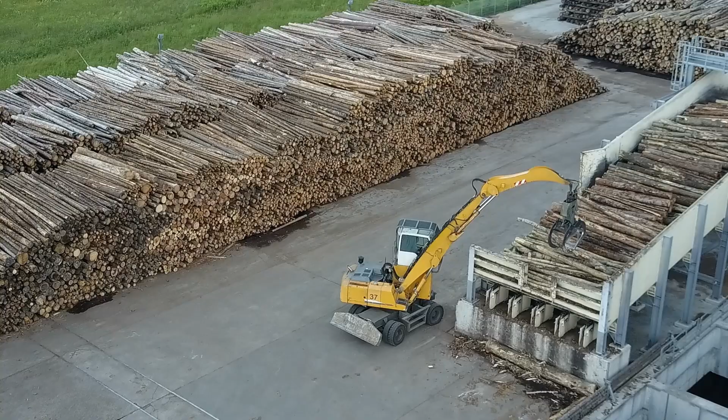Today we have a special guest from one of our partners, Asta Fivgas, who works for RWW, Reflections Window Wall. They are in the process right now of designing and will start building our Passive House rated facade at the Edison, which is the 32-story mass timber project in downtown Milwaukee. One of the big feats they are tackling is how to design a glass facade that meets Passive House criteria, which for those who know Passive House is no easy challenge.

So today we're going to talk a little bit about the Edison and then dive into the sustainability features of our facade and how RWW is designing the facade to meet Passive House criteria. So Asta is going to walk us through it, which I'm excited for. And maybe, Asta, just to kick us off, if you could give us a little bit of background on yourself and RWW. Sure. Hi, everyone.

My name is Asta Fivgas. I am the Director of Preconstruction at Reflection Window and Wall. I've been with Reflection going on 7 years at this point. My background's in architecture. I'm a registered architect in the state of New York. Design-wise, I started in high-end design, moving into more technical architecture, worked at Thornton Tomasetti for a time before joining Reflection on the construction side, learning more about technical aspects of new facades and high-performing facades, as well as a lot of our sustainability. So thank you for having me.

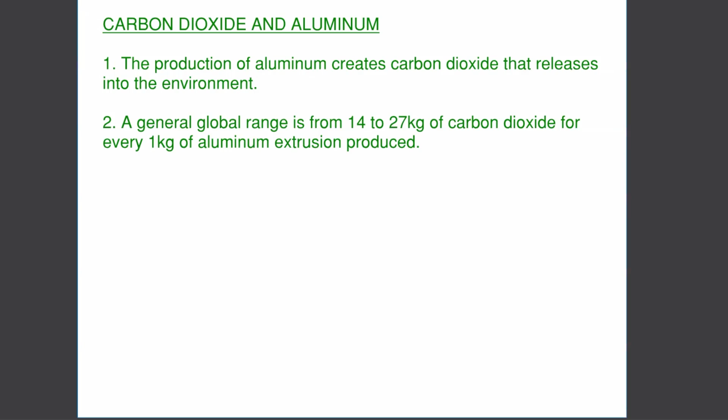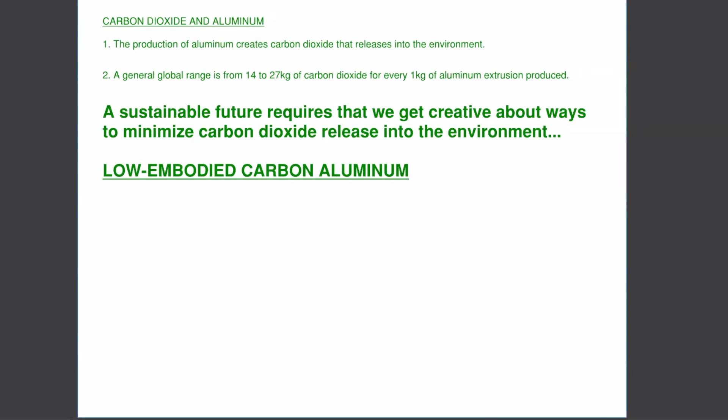So one strategy that we've worked very hard on at Reflection that I'm very proud of and that we are trending towards across all of the new projects that we're working on is looking at low embodied carbon. A sustainable future requires that we get creative about the ways to minimize. So low embodied carbon aluminum utilizes supply chains that are able to support their production by way of renewable energy, as in solar energy and hydro-powered plants.

And if we're at an initial rate of 14 to 27 kilograms per 1 kilogram of aluminum, that can be reduced down to 2.6 to 4 kilograms per one. And that's an 80% plus improvement depending on who you're working with and who you're supplying from. So when we started talking to Neutral Project about this job, that was a big point that we were really excited to commit to exploring and trying to utilize on this job.

And one thing that I want to just point out quickly for those that are listening is that we're not reducing the amount of energy or embodied carbon required to make aluminum, but instead we're just replacing the source of that energy. So instead of getting it from coal power plants, we're getting it from solar and hydro powered plants. So we don't have the magic cure for figuring out how to make aluminum with way less carbon and way less energy. It's just basically replacing and substituting some of the energy sources. Correct. So it's focusing on partners who are able to provide more sustainably minded energy sources for their production.

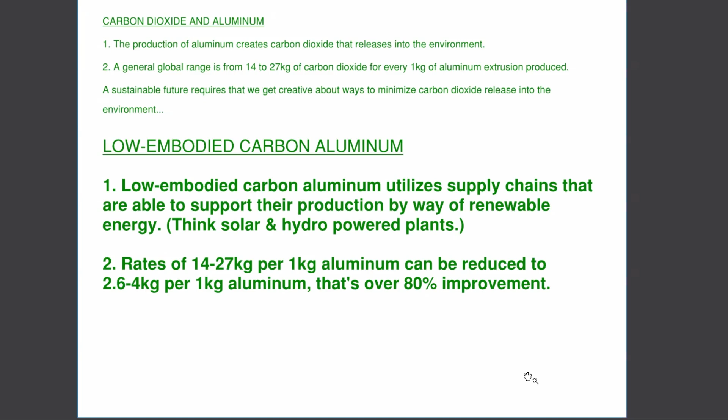That's 100% correct. And we don't really stop at just low embodied carbon aluminum for this job. We also are working with partners across the board in other aspects of assembly, sealant, paint, all of those different areas where the unitization is affected, who are able to do that with solar powered plants. And luckily via both Mumbai and Qatar, I think we're more focused on Mumbai for this project at this point, Dow just certified one of our partners for the carbon neutral sealant. So we're able to utilize that on this job. So it's not just the aluminum production itself, but what are the other aspects of the project that can be more sustainable.

Moving on quickly to this next point, talking about performance goals of the project's facade. So as Nate mentioned, this is a passive house project. So there's a tremendous amount of goals across the board for all scopes. Regarding ours, it's the idea of a high performing facade. So Reflection's able to assist with a lot of energy modeling. We've been working with the project team to review and model different selections, different ideas, figure out how it impacts the job on both micro and macro levels and how it contributes to the overall building.

So perhaps if something in the facade moves a little higher, it can offset something in the HVAC and vice versa. The project also required triple glazed units instead of regular IGUs. There was an increase in the project on opaque versus vision area to improve the R value of the building. The goal for this project for vision was a U value of 0.24, which is lower than typical code, which converts to an R value of 4.17.

Additionally, for the TGUs, for performance, there's a requirement for warm edge spacers, argon infill, some of the more typical things, but applied to the triple glazed. And then also looking at triple silver low E as the baseline for the low E product. And the TGU stands for triple glazed unit. Yeah.

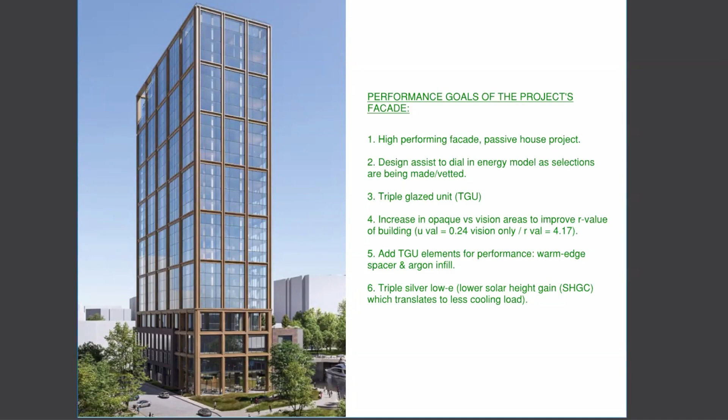And that's a nice little render from an early phase of Edison. So let's talk about low E. So right now on the screen, I'm showing a comparison between two low E products, one a Solarban 67 and one a Solarban 72. Solarban 67 is a double silver, and Solarban 72 is a triple silver. And in the chart, you can see that both the U factors in the winter and the summer are the same, but you start to see differences in the VLT, which is your visible light transmittance, and I'll have some slides to explain that later.

Your SHGC, you start to get slightly better performance with Solarban 72, and then your exterior reflectance and your interior reflectance. I like to think of it kind of as the mirror effect of the glass, like how much you can see in the glass when you look at it, both from the exterior and the interior.

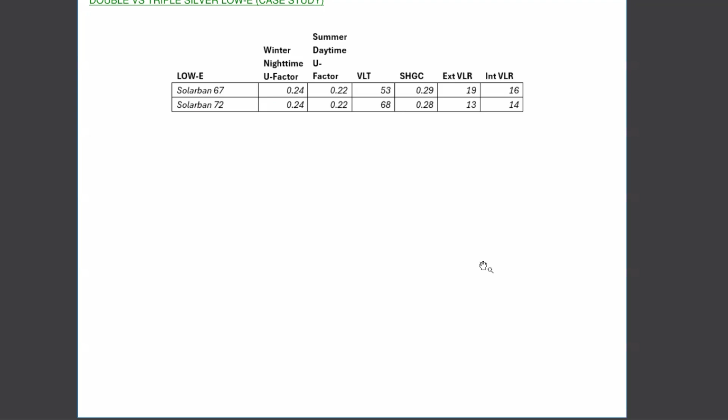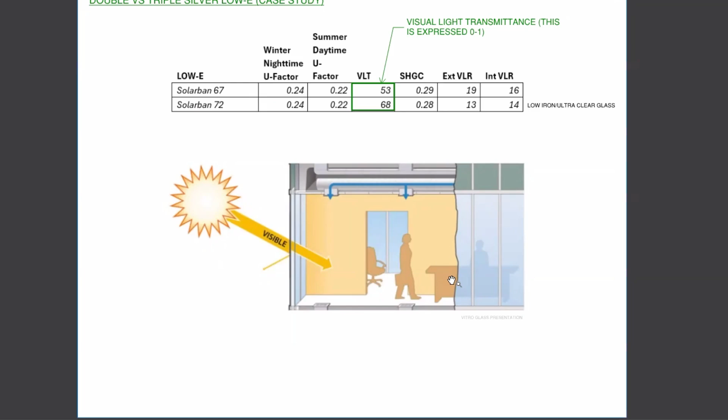So when we just look strictly at visible light transmittance, this is usually expressed in a 0 to 1 ratio, or in this case, 0 to 100. That would be like 0.53, 0.68. And that's the amount of visible light that you're able to see through the glass. And you'll notice that the triple silver has slightly better performance, but it also has better visible light transmittance, which from an occupant standpoint is more attractive. So that was a requirement of the project that also had a benefit as well.

And then thinking about the U factors and SHGCs, since most people don't use these terms every day, the U factor is basically how well it insulates. So what you want is a lower number here. So 0.3, 0.25, 0.24, you're improving on the insulated value. SHGC is your solar heat gain coefficient. And basically, for our purposes, we also want a lower number here, which means that we're not taking on additional heat. If you have a higher number, it means that it's really good at solar heat collection, and not something that we wanted for the performance of the facade in terms of the Edison. So that kind of explained those two.

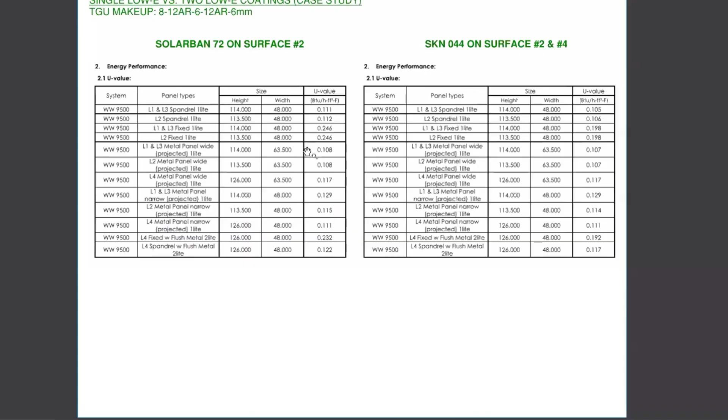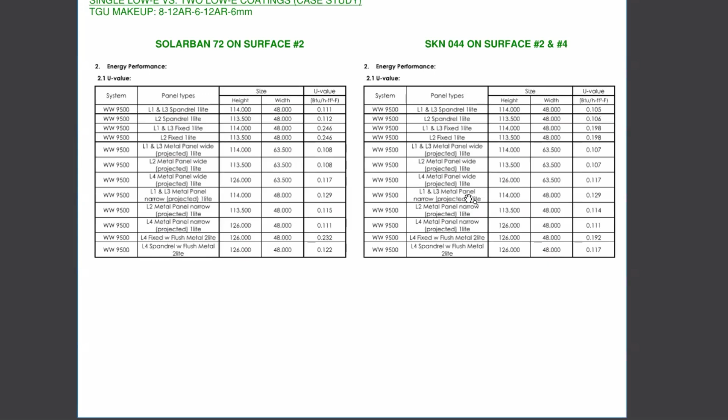But as we talked about earlier with visible light transmittance, though you get a small improvement on U value, you have to think about the percentage of visible light. So for this Solarban 72 product, the VLT was around, I want to say, 68. So when we look at this chart, you're in between here, which is pretty clear. It's a pretty good vision for the job. When you're looking at two stacked low E's, the SKN product is a 48-49 on the VLT scale. So think about looking through 2 of these stacked on top of each other, which will probably be closer to a 35-40. So there's a dramatic change on the occupant experience with the higher performance.

And that's something that we've been working a lot with the design team to weigh against each other. How much do we need for performance? How much of an impact will it have for the occupant? I think it's something that you don't really think about a lot. Sometimes we get hyper-focused on the facade just needing to meet these performance goals and look nice from a distance. But when you're standing outside or looking out over the city at night and everything's really dark because your glass has so many low E coatings and the VLT isn't very high, that's a sensory experience that might not be appropriate for the job.

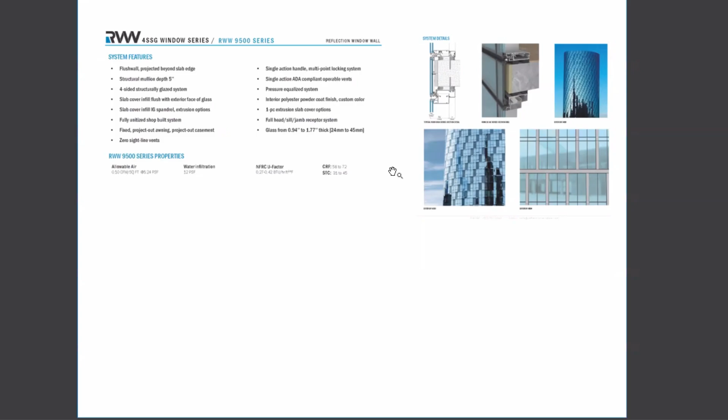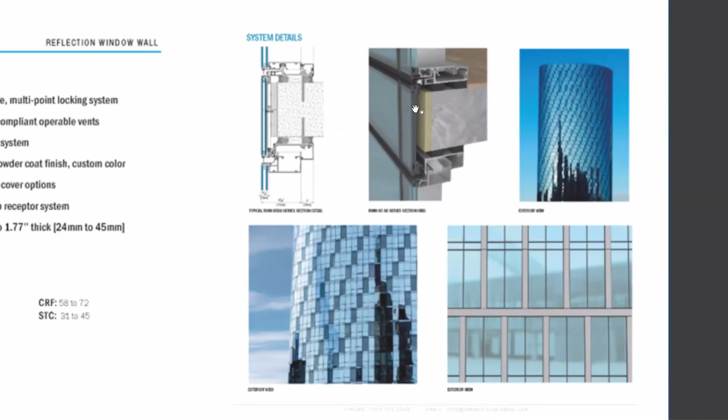A little video that kind of shows the thermal performing portion of the facade versus the air tightness. So the system on Edison, it's a window wall system. It's our RWW 9500 series. It's a flush wall window wall. So I'll zoom into this detail, which is a little pixelated, meaning that the window wall itself cantilevers over the slab edge so that it can pick up a flush slab cover. So this is just kind of an easy detail of that.

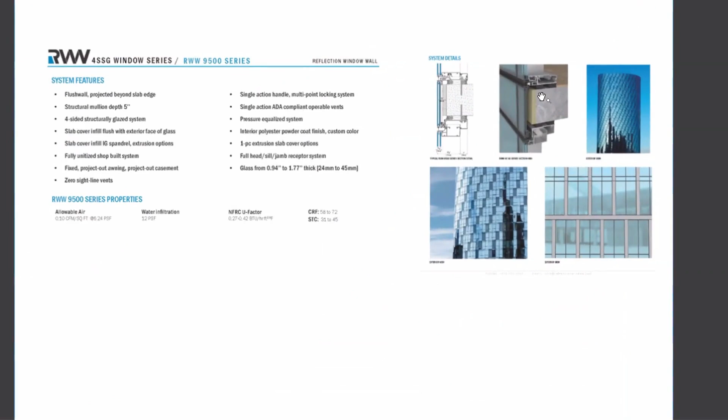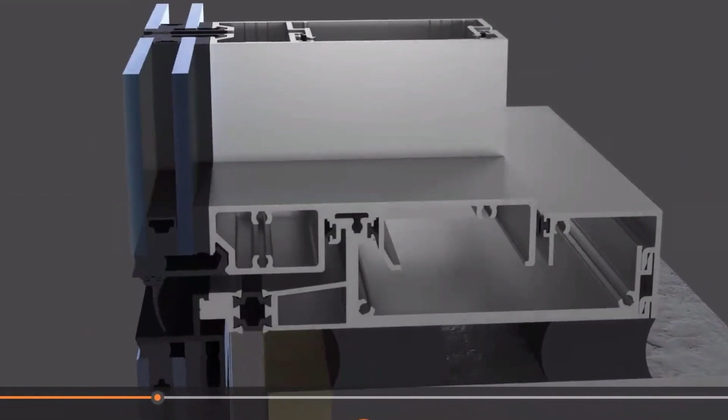And with that being said, the idea of a window wall performance, you're not like a curtain wall where you have fire stopping and you kind of have a unit that encapsulates the facade edge. The facade ends up being a rain screen system. So this is just kind of showing the facade components, and then it's going to show you both the thermal and the air tightness of the facade.

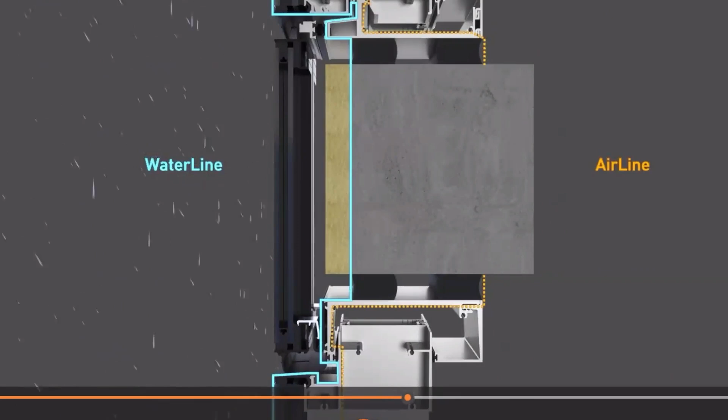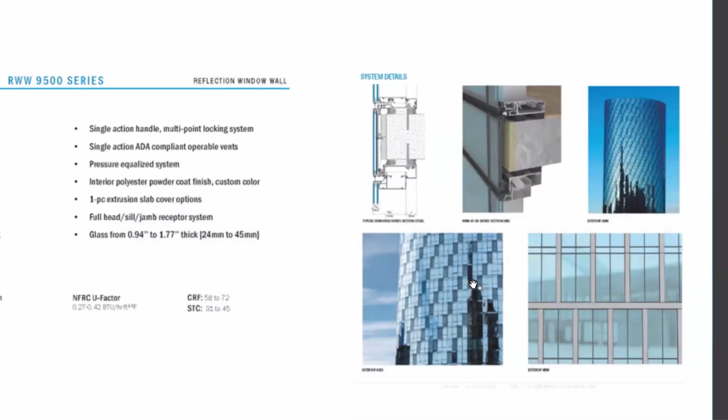That's our head receptor. That was sill receptor. You see the insulation. So this is the water line in blue and the air line in yellow. And then this is kind of a thermal performance to see, we've got a lot of special thermal breaks and stuff in the system to help control that. Thinking about air tightness, one important thing is that when you get air changes through air leakage within the system, you end up losing the heat or cooling inside.

So even though we're really focused on making sure the IGU has really high performance, we've got a good U value, we're thinking about how it's going to perform in the summer, how it's going to perform in the winter, how it's going to help the HVAC. If you don't have air tightness, you're just going to have a tremendous amount of air leakage, and it kind of negates some of those moves. So with air changes through air leakage within the system, you end up losing the heat or cool inside the building through the air changing itself. So no matter how high your R value, which is the inverse of your U value, is, if you don't have air tightness, you're counteracting those moves.

So now we've talked about some of the terms and the important aspects. One thing I did want to go into is the system we provided and things that we did above and beyond our baseline system for this job to help meet standards. I already talked about the ongoing work with the team to model everything in real time so that we could make good decisions that were building on each other.

But additionally, we were trying to maximize the vision glazing since opaque has better performance than vision, but you can't just have one building that's all spandrel glass. You need some sort of vision area. So for that, it's trying to maximize the vision within the stringent performance requirements, modeling these strategies to settle on the best performance and aesthetic value.

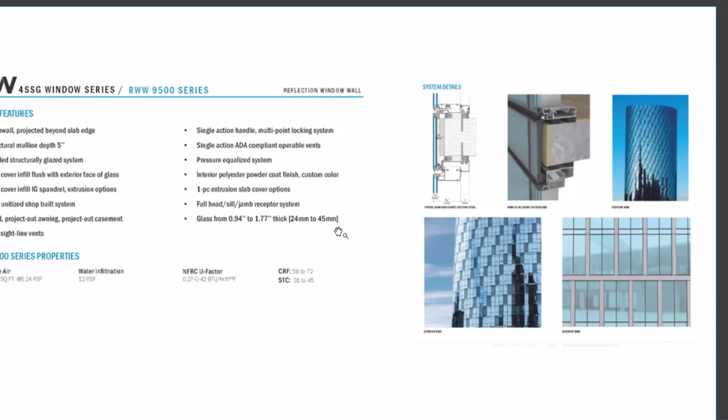Maximizing the amount of insulation at the slab edge. So what that means is this area here is insulation, and this is just a standard detail. So basically you're looking at 1 inch of insulation. This is like a 2-inch space. So it was how do we get more insulation stuffed in this cavity so that there's better performance here.

Additionally, some moves on the job that I don't have a detail of are interior furred walls on the interior of the building. So on the back side of the window wall, there was a lot of coordination with other trades who would be putting in stud walls, putting in insulation, coordinating what the condensation would be there, making sure that everything was performing correctly, because with the window wall system, the back of the system is basically your air barrier. So having all the insulation inboard, what was the impact? And then for the opaque areas, we designed custom thermal breaks for the project with new adapters for the system infills, including the metal panels.

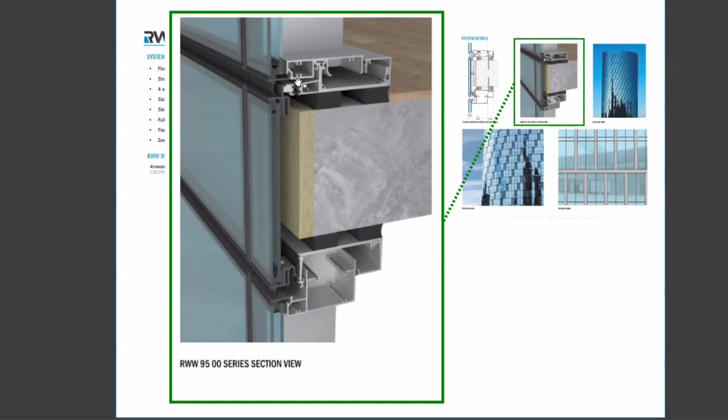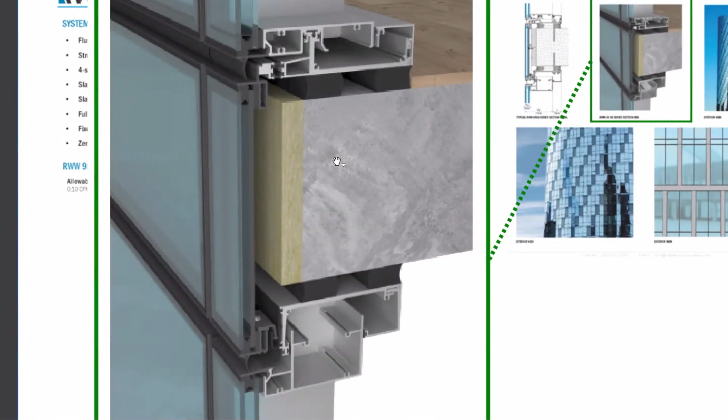And a note on that, just for thermal in general, aluminum is 3 times as conductive as steel. However much insulation you have in the metal of the panel ends up being short-circuited by the aluminum. So you need to tackle the conduction you're getting through the mullions themselves, which is generally handled with non-thermally conductive product. So these little guys here, which are a little hard to see, they're thermal breaks, and the product that we use, the best one to look at, we typically use a polyamide fiberglass extrusion. So those are just a couple of the moves on this job that we made.

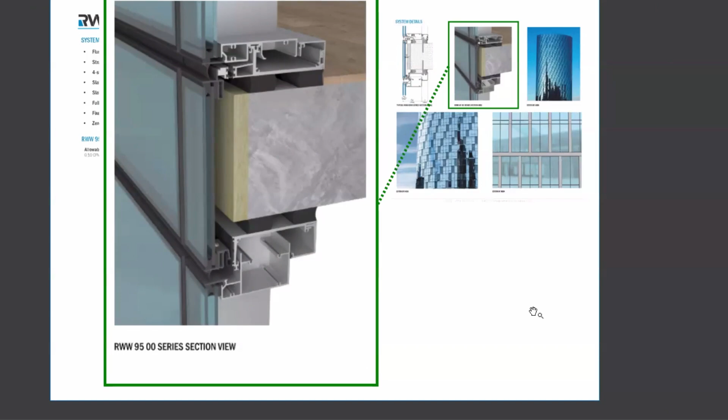Can you explain for the audience what a thermal break is for those maybe who aren't super familiar with technical terms? Yeah, I think the easiest way to think about a thermal break is, I think the video may have had a good, let's see here. When you look at this thermal view right now, yellow is hotter, this is cooler. I think this is about 50, 60 degrees in the modeling scale. When you look at this, this is your thermal break.

So it's basically disconnecting two aluminum pieces from each other and preventing the cool or the hot bridging through them. So you still get the performance of both of your aluminum elements, but you're stopping them at a certain point. So you can see it actually happening right here. And the reason why we're concerned about thermal breaks is because those are the areas that the exterior directly connects to basically the interior of the building. Whereas in the middle here, like the slab edge, you have insulation and an air cavity where you don't have a lot of that thermal transfer coming in.

Correct. Exactly right. See, in layman's terms. You are an expert on thermal bridging. Definitely not an expert. Yeah, that is kind of what I prepped for this.

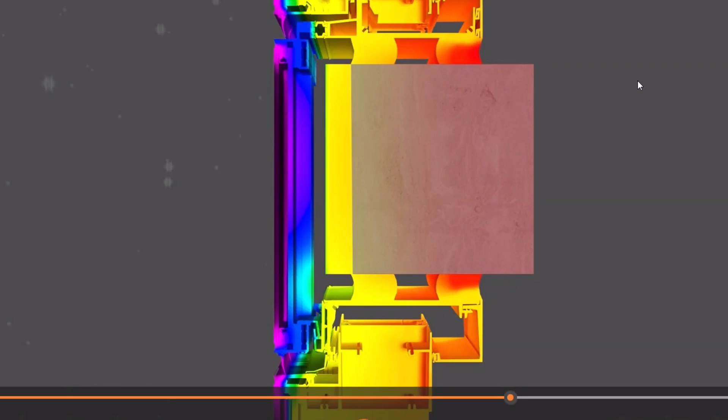Cool. One of the other questions I had, which has been a big point of conversation with the design team, is nobody wants to feel like they're walking into a dark room when they walk into a unit. Yeah. And so that's something that we've been talking about a lot with the VLT ratio that you discussed. And it sounds like we're in the range of very light, actually, not super dark, which is great to hear that we solved that problem.

And it also had pretty low reflectance both on the interior and exterior. So if you're standing in your unit at night, you're gonna be able to look out over the city. You're not gonna be looking at yourself, which is always a bonus. Yeah. I hate that when you look into a window and you see yourself reflected.

Yeah, that's the worst. The other question I had for you is, because it's a window wall system, which for those who don't know, most developers either go with window wall, a punched opening, or a curtain wall. A punched opening is you build out a wall and you put a window in it. Window wall is basically just a big window on the deck, and curtain wall is actually structural, so it hangs off of the building. But because we picked a window wall system, what are the implications for install that are more challenging versus doing, for example, a curtain wall system?